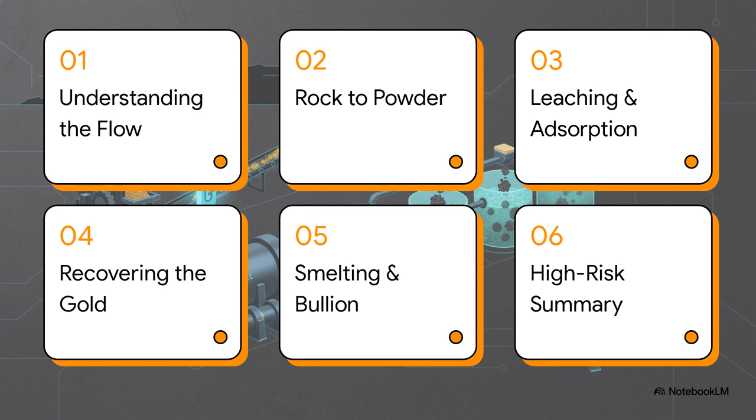Okay, so here's our game plan. We'll start with the big picture, then we're going to track the gold from a raw piece of rock to a fine powder. After that, we'll dive into the chemistry, how it's dissolved and then captured. Then we'll see how it's recovered and finally smelted into a solid gold bar. And we'll wrap it all up by spotlighting the absolute highest risk areas you need to have locked down. All right, let's dive in.

Your number one mission as a security officer is to know this process inside and out. And why is that? It's simple, really. Once you can map out the entire flow in your head, you can start to see where the weaknesses are. You can anticipate where threats are most likely to pop up.

Now, this diagram here, it takes a massive, complex industrial operation and boils it down to a single map. This is our bird's eye view. Just follow the path, from the raw ore at the top, through every stage of processing, all the way down to the final, incredibly valuable product at the bottom. This is the journey we're about to take.

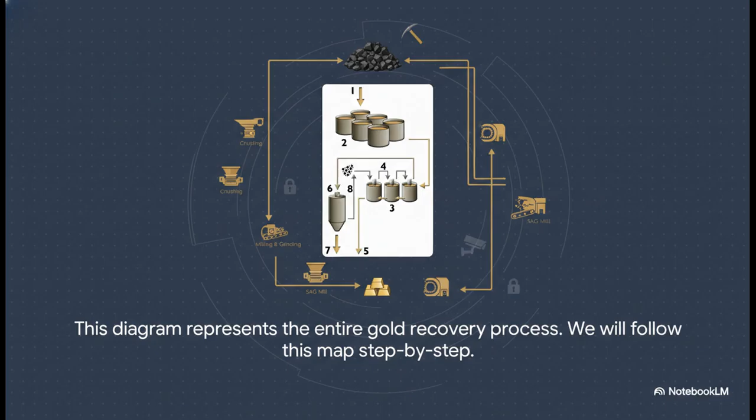Look, this is the core principle, the absolute foundation of your entire role. Every patrol you do, every camera you monitor, every lock you check, it's all useless if you don't understand what you're protecting at each specific stage. This knowledge is what turns security from just reacting to problems to actually getting ahead of them.

All right, Section 2, from rock to powder. Let's get into how this whole thing starts. We're at the very beginning, the most physical part of the process, where these huge gold-bearing rocks get broken down into something that looks like fine dust.

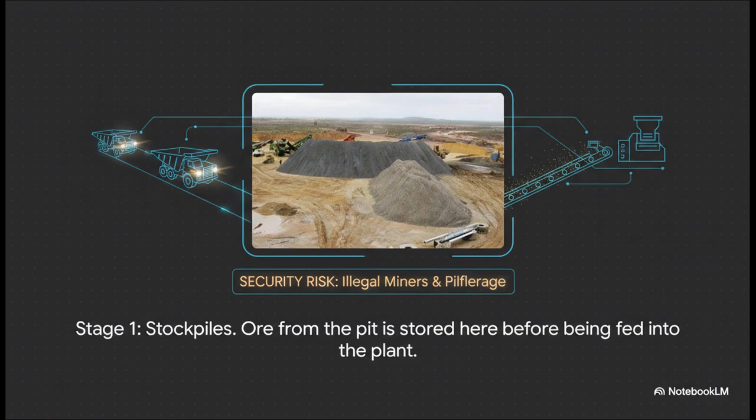Everything kicks off right here, at the stockpiles. This is where trucks dump the raw ore straight from the mine. The easiest way to think about it is like a giant pantry for the plant. It holds all the raw ingredients before they even get close to the production line.

Now, here's what's so important to get. Even at this raw stage, the product is valuable. These aren't just any old rocks. They're gold-bearing ore. Illegal miners know this, and you better believe they target these stockpiles. Your job is constant, vigilant monitoring and super strict access control. You can't let this raw material just walk off the site.

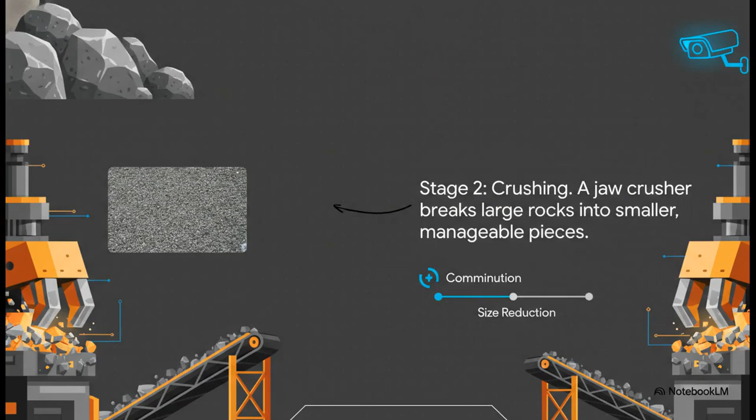So from the stockpile, the ore gets fed into the crusher. And this is just brute force on a massive scale. The jaw crusher does exactly what it sounds like. It literally chews up these enormous rocks and spits out much smaller, more manageable pieces. It's the first step in what the engineers call comminution, which is just a fancy word for making big things smaller.

After the crushing, the ore moves on to the mills for the final grind. Inside these giant rotating drums, that rock is pulverized into a fine slurry, like a really fine powder mixed with water. The whole reason for doing this is to create as much surface area as possible, so that every single microscopic particle of gold is exposed for the chemical process that's coming up next.

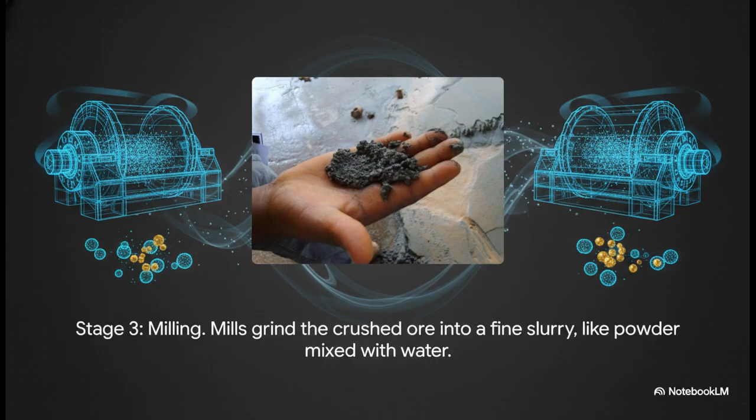Okay, so we've physically broken the rock apart and freed up those tiny gold particles. Now we move into the chemical stage. This is where the real magic and the real chemistry happens. We're going to actually dissolve the gold right out of the rock and then capture it.

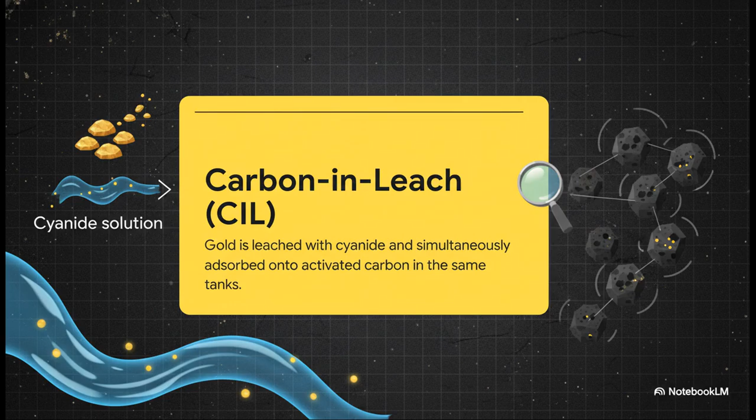The heart of this stage is a process called Carbon-in-Leach, or CIL for short, and it's an incredibly efficient method. What you've got are two critical things happening at the exact same time in the very same tanks. A cyanide solution dissolves the gold, and at the same time, little pieces of activated carbon act like tiny magnets, capturing that dissolved gold.

So let's break that down. First, the slurry we made flows into a series of big tanks. Then, the cyanide solution is added, which dissolves the gold. Next, the activated carbon goes in. Now here's the really clever part.

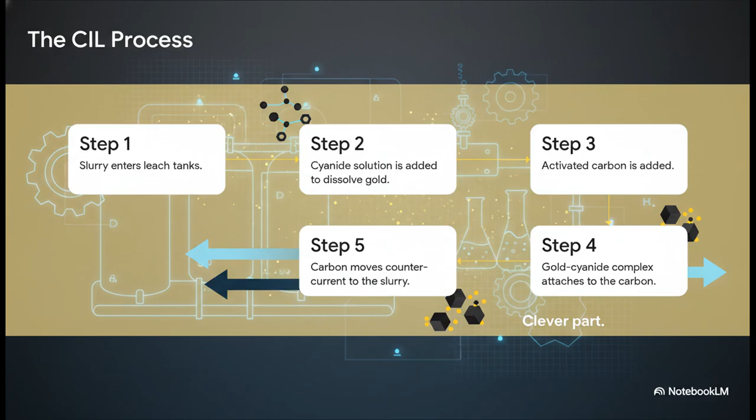The slurry is flowing one way, but the carbon is being pumped the opposite way. This counter-current flow is just brilliant engineering. It makes sure that the freshest, most active carbon meets the slurry with the last traces of gold, so you capture as much as humanly possible.

So we've successfully captured the gold onto these little pieces of carbon. Great. But how do we get it off the carbon and into a form we can actually use? Well, that brings us to the recovery stage. It's really a two-step process. First up is elution. The loaded carbon gets washed with a hot, potent chemical solution that basically forces the gold to let go and dissolve back into the liquid.

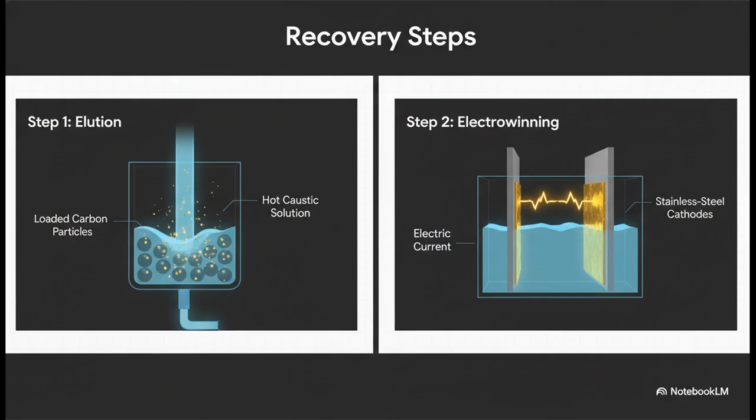Okay, let's move to the final and, frankly, the most critical transformation. We are now entering the highest risk area of the entire plant, where that muddy sludge gets turned into the final product that everybody recognizes: solid gold bars.

That unassuming sludge is melted down, the impurities are skimmed off, and it's poured into these molds, creating what are called doré bullion bars. This is the critical moment. The product is now in its most concentrated, most valuable, and yep, its most portable form. Seriously, let this sink in.

Of all the acres of machinery, all the miles of fence line, this one room is your #1 security priority. Period. This is where the result of the entire massive process is kept. The value is immense, and the security protocols here have to be absolutely airtight.

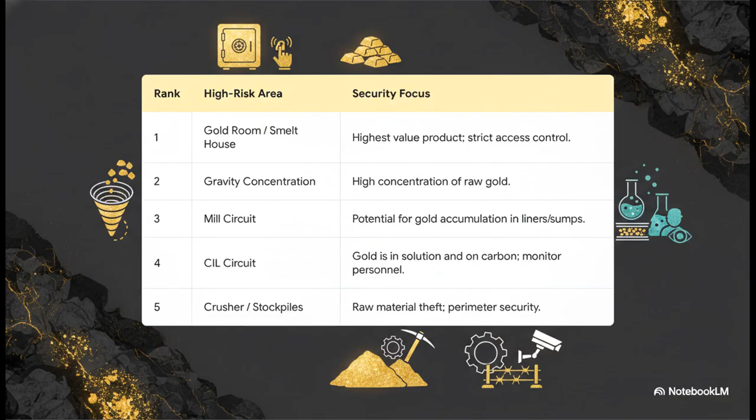So I'll leave you with this question. You now have the map of the physical process. But security isn't just about outside threats, is it? Look at this flow again from start to finish and really ask yourself, where does an insider, someone with knowledge, with access, with a badge, pose the greatest danger? Because understanding that, well, that's the next level of securing the product.